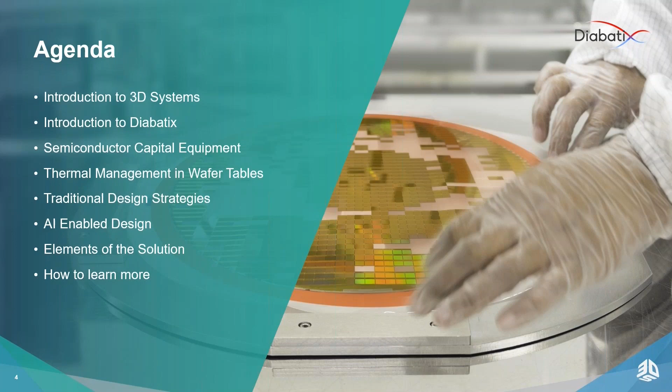And we will then compare the traditional design strategies with the design strategy that Scott and I took, or that both our teams took, in order to solve this problem and to get to better solutions. In the end, we quickly summarize what the elements of these solutions were, and of course we have a little dive in how you could learn more, or how you could get more information. But let's start with a quick introduction of the two technologies.

Yeah, first I'll start off by talking a bit about 3D Systems. 3D Systems is organized into two major solution groups. On one side, you've got the healthcare solution group with some segments inside. On the other side, you've got the industrial solution group with segments inside. And I manage the semiconductor solutions segment. And as you can see, we are hyper-focused on providing full solutions to industrial segments, as you see on the screen, including energy, aerospace, consumer, transportation, motorsports, as well as green technology. Next slide, please.

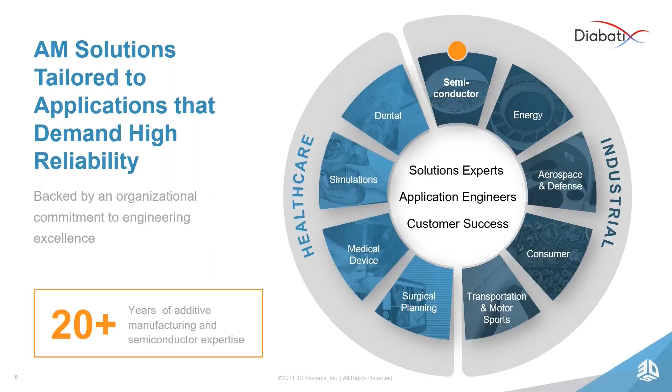A little bit of background on 3D Systems. We developed the first SLA 3D printers, so you could say we invented 3D printing about 40 years ago. And not only are we the company that invented 3D printing, but we've continued to innovate over our nearly 40-year history. So as you can see, we have continuous innovation, and here's just a sample of some of our latest. Next slide, please.

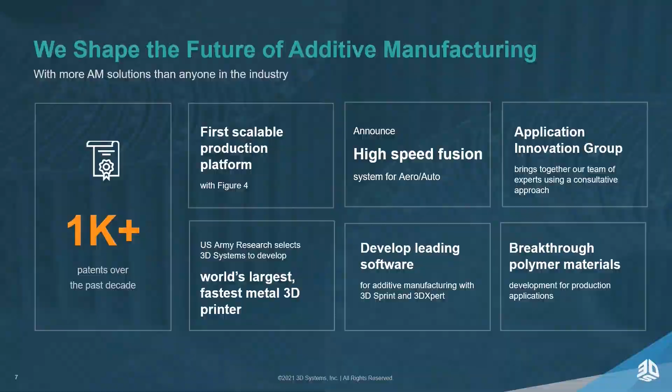And we use a very unique approach to helping our customers be successful with additive manufacturing. It's about a 5 to 6 stage approach, which allows us to start with a feasibility study and an exploration of applications or a potential problem solving exercise. And following that, after we find some low-hanging fruit together, what we want to do is try to innovate. And once a customer has decided to make a transition to additive, we try to figure out how to make the best use of additive technology, and that includes working with our friends such as Diabatix to really cram as much value as possible into the transition to additive manufacturing of legacy parts or brand new designs.

And then we continue on to develop the actual manufacturing process and validate its compliance with your requirements, and then figure out how to either produce in a short run or batch production, or transition that production off to a manufacturer which can really scale up.

So our business is not a service bureau, but what we do is solve problems and do bridge production or long-term production for our customers. But ideally, we want to help take that whole package of information and transfer that technology off to a supplier, which can help scale it to large quantities. Next slide, please. Thank you.

And then again, we do have over 150 machines working 24 hours a day, 365 days a year in highly regulated industries. So we have all the appropriate certifications to do highly regulated work. And I like to say we specialize in torque as opposed to speed, because what we can do is offer batch production solutions across the whole range of materials that we do have.

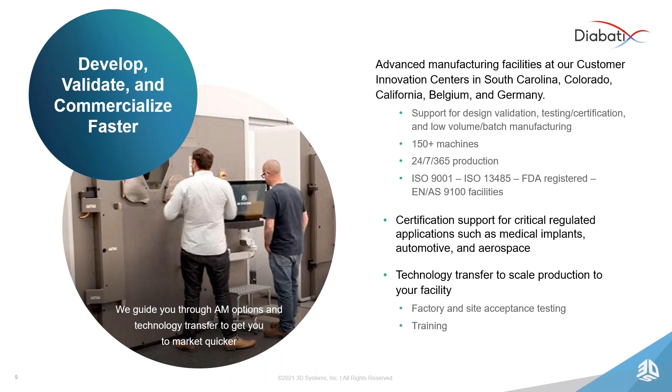And we're running over 150 metal machines nonstop, 24 hours a day and 7 days a week in highly regulated industries. As you can see, we have all the ISO certifications to operate in FDA environments as well as aerospace. And I like to say we specialize in torque, which means what we can do is offer the broadest range of capabilities across all of our materials and across all post-processing capabilities to really certify and create a process that can be scaled up. Next slide, please.

Okay, thank you very much, Scott. Let's take a quick deep dive as well into the technology of Diabatix. Diabatix, the company itself, was founded in 2016 in Belgium, and we specialize in generative thermal design. And by doing that, we try to innovate the way thermal engineering is done, and we try to basically guide thermal engineers, thermal architects to a new workflow. And this new workflow, if we evaluate it over our clients, typically ends up in 30% better thermal performance. I think the use case of today is an excellent example of that.

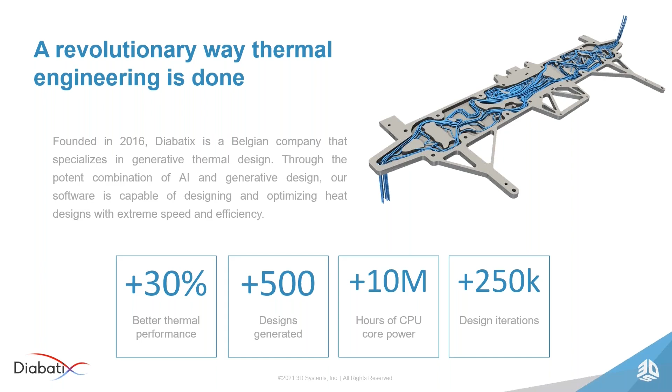The way we do that is we apply generative design, and basically we wanted to get rid of the conventional way of engineering, where engineers approach designs by making CAD models, simulate it, go back to the drawing table, reshape the CAD model, simulate it again, and we try to fully automate the design cycle to get to optimal heat sinks in no engineering time. So besides the thermal performance gain, we try to focus as well on reducing engineering time. We know all your time is limited, and if we can automate a part of the design job, I think that's a useful case for everybody, especially in complex situations like the semicon example that we have today.

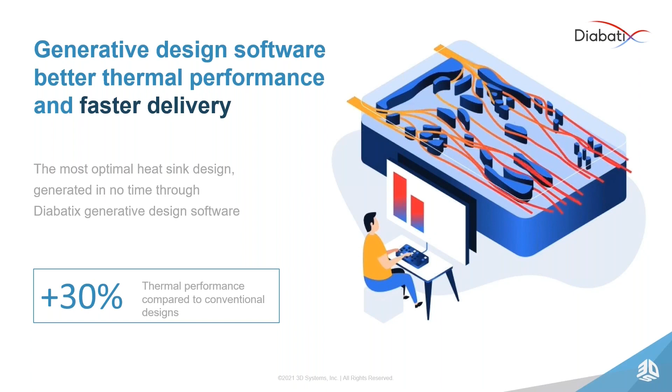And this technology nowadays is applicable in a lot of industries. If I have a look at the most common industries where generative design for thermal applications is applied, I'm looking into data center cooling, aerospace, electronics, laser cooling, where you have a very high power density, automotive, of course, because there the challenge is very big with the switch to electrical mobility, and as we will see further on in the webinar, of course, the semiconductor industry, where especially temperature variance is really important.

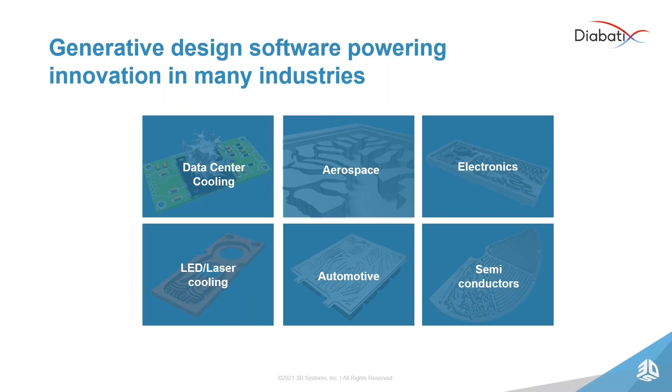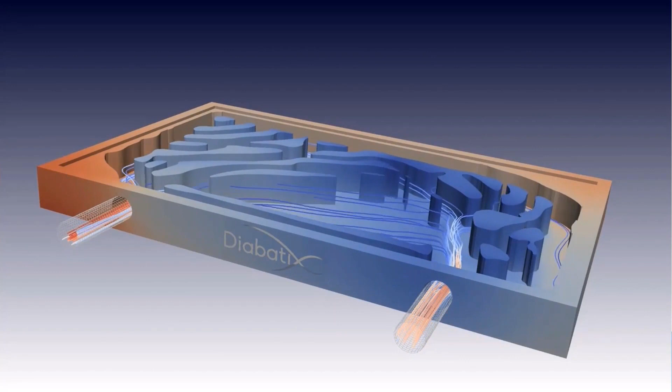To get you familiar with the technology, I'm showing you one short movie on how a design is generated, just to give you a look at how generative design works. What you can see happening in here is one design run where 500 to 1,000 iterations are happening. And in each of these iterations, a design is created and is analyzed. And based on this analysis, a new design is created and is improved. And by letting the computer just do it over and over again, you get to better results. So that's, let's say, generative design at a glance.

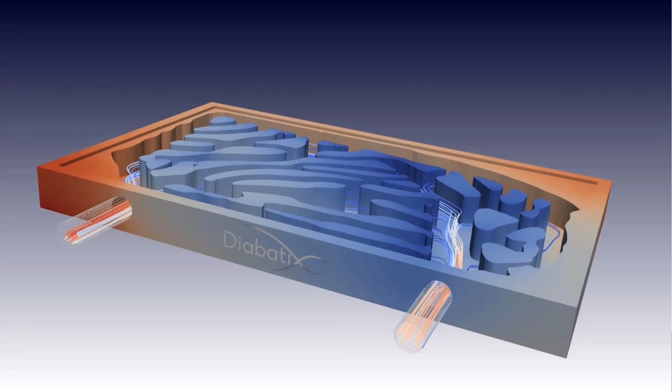The biggest benefit of that is that you can create very complex boundary situations, very complex constraints, and so on. It's a computer system, so it can handle that as long as you put enough computational power in the back. And by handling these complex situations, you can come to very good results, which are, as engineers, very hard to achieve because of complex situations.

And with that, I'd like to take a look at some of the issues related to semiconductor capital equipment manufacturing, as well as semiconductor supply chain. So we'll give a little bit of insight on what's happening with the chip shortage and what's going on in the semiconductor capital equipment industry.

This equipment is very critical to feeding the silicon wafer product into the supply chain so that we can all buy our phones and drive our cars, and we're all feeling that pain right now. So right now supply chains have been disrupted, and that doesn't mean just getting the product into your computers or your electronic devices. You've got a very complex manufacturing tool. There's a supply chain that feeds that too. So in order for foundries which make use of this equipment to produce silicon wafer product, they also need to produce capital equipment, which is highly complex.

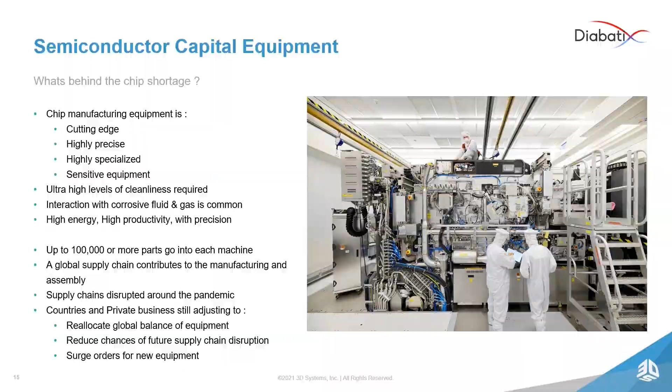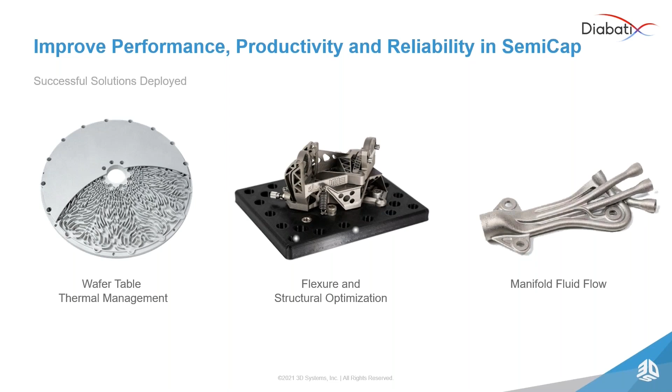And there are three clear examples of where additive manufacturing and generative design can contribute to this space. Those are wafer table thermal management, which will be the subject of the rest of this presentation, and also optical flexure integration, as well as structural optimization of components which need to have high strength to weight ratio. And of course, in wetter processes or hydraulic applications, optimizing manifolds for smooth or laminar fluid flow and reduced disturbance in a line is quite critical. But most of our look today is going to be at the wafer table thermal management. So let's talk about some of the challenges related to that.

Now, in a typical problem description, we want to talk about the challenges and the benefits of the solution. Some of the challenges with wafer table thermal management is you typically have cross-functional design committees, so many people involved in trying to develop this machine and every single component in it. The more people you have involved, the slower sometimes a process happens. And specific technical problems are you want to maintain the most even temperature across the surface of that wafer as possible. And there are several reasons for that. Sometimes you need to condition or relieve stress on a wafer so it stays very flat during a process. And then later you may want to keep that temperature at a stable state during the lithography or deposition or photoresist strip process.

So because of that, it's very important to have the ability to precisely control temperature gradients as well as time to cooling. And then additionally, for any complex component, you always have some sort of assembly, quality, serviceability, or component longevity issues. Anywhere there's a weld or an assembly, you have a point of failure.

So it's preferred to have single monolithic, functionally consolidated parts over assembled parts, not only because of serviceability, but also production time. It's much faster to make those. And then again, because of the semiconductor supply shortage, production and productivity is always going to be a concern where we're trying to crank out more wafers as fast as possible with better quality. So anything that is going to reduce or shave off seconds in cycle time is going to be helpful.

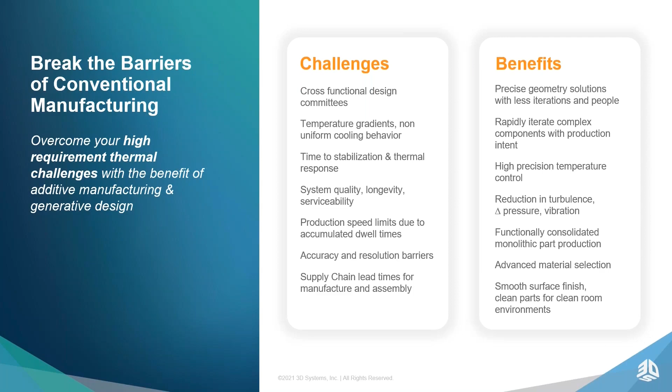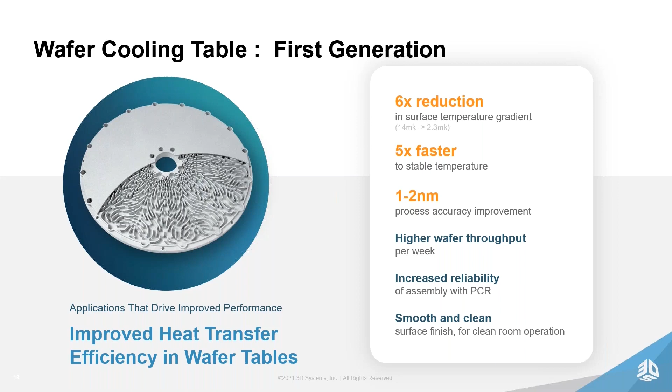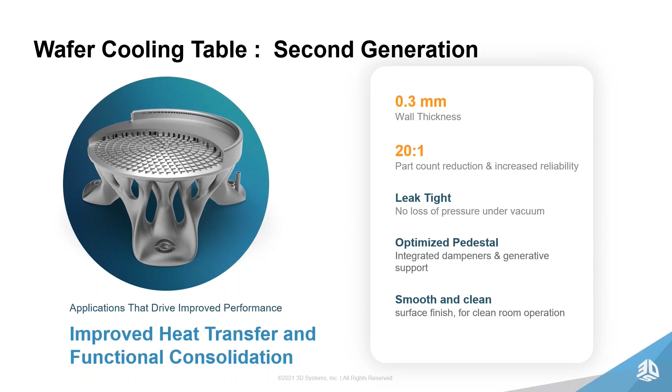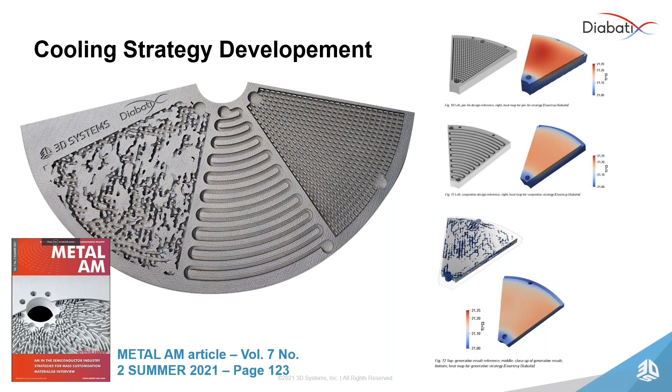And the next thing we're going to discuss is a deep dive on this cooling structure. So let's talk really deeply about cooling structures and how they can benefit silicon wafer manufacturing. You may have seen our Metal AM article, which is a case study on optimal cooling structure design. And here's a quick look at the end result that we're going to go over in our next slides.

Now, let's talk about traditional design first. Traditionally, in order to create a cooling pattern, we start with a best guess in traditional design in parametric CAD to hit some specific requirements. And the requirements of a wafer table are going to be low pressure loss. So you want to make sure that you're not overcompensating or pushing too much fluid into the system and then losing that pressure with a super long line or inefficient cooling pattern.

You also have a requirement for very low temperature gradient across the surface. And that's a measurement of how much you're allowed to fluctuate in your temperature across that surface. And that requirement means that you must have very good heat spread or cooling spread. So you need to be able to control that temperature within a very narrow band across that surface. And anywhere possible, you need to be able to have a short cooling time or short heat up time, as well as a rapid thermal response. So if things change and you need to compensate and overcool or overheat to compensate for an environmental situation, that thermal response needs to be very precise again, and this affects productivity.

Also, you need to consider the fact that when you're creating a very complex component that may be traditionally manufactured out of multiple pieces through machining and braze welding, the part needs to be long-term stable with no leaks, and it also needs to be mechanically stable, so you need to reduce any chance of vibration or variability in that process, because in semiconductor capital equipment, productivity and success relies on the system working as close to theoretical values as possible. So you need to create that environment inside the machine.

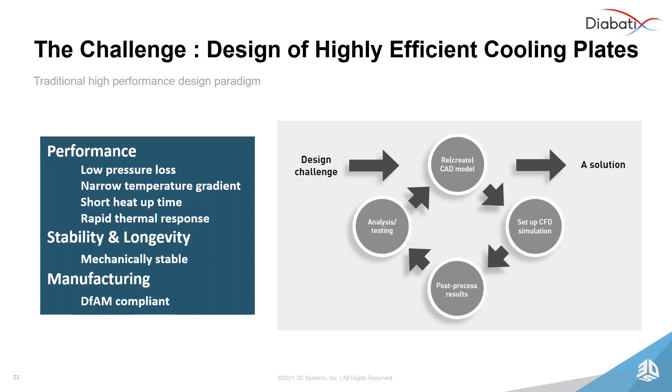And finally, from a manufacturing perspective, with traditional design, you're going to have so many limitations with what you can do that typically you've got a lot of design for manufacturing constraints. And when trying to transition this to additive manufacturing, all of these things need to be considered simultaneously, and that actually involves quite a lot of people and iteration with tools on the market today. And now the Diabatix solution offers you efficiencies that we're going to talk about in the following slides. Let's talk a little bit more about the limitations of traditional parametric design.

Now, best guess is typically the way most thermal engineers start, using some design simulation or thermal simulation. They make some best guess at the patterns that they can implement based on things that they know from the past. Now, the problem with that is if you're using a parametric framework for a design architecture and trying to edit that in the traditional BREP CAD environment, there's many limitations there.

A parametric design setup will allow you to have some iterations and customization of a design strategy, but it's easily breakable. It's not necessarily going to work for every single design iteration. So there's a very narrow window of parameters that you can change in order to get a quality result. And as you can see on the right, here's a design architecture that has some parameter adjustments associated with it, and you can see it being easily broken when parameters pass a threshold value.

So that traditional best guess approach is not ideal for precision cooling requirements or high productivity cooling requirements. It also doesn't take advantage of the value of additive manufacturing. To some degree, it may, but this design here is easily machinable. But then again, if you go to machining, you have to deal with traditional assembly and welding for consolidation of the design. And this does require a lot of lead time for traditional manufacturing, testing, simulation, and a lot of people involved in order to validate that design.

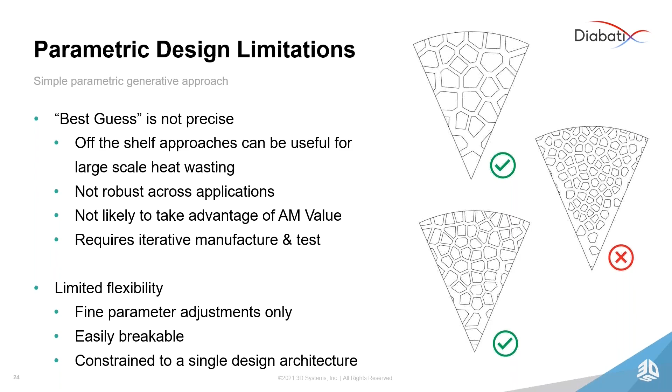Okay, thank you, Scott, for explaining a little bit about parametric design already. Now, one of the things that we did together in this case study was making a few traditional designs or parametrically optimized designs, just to see how they would behave if you would compare it with a design which was created with a combination of generative design and additive manufacturing.

And one of the first designs that we ended up with was a pin fin design, as you can see on the right bottom of the slide here, which is very easy to deploy. It's very easy to create. Also, if you want to optimize this in a parametric way, it's easy to define your parameters like pin distance, pin fin diameter, and so on. But the disadvantage of that is it's not very complex of a design, and I'm not saying that complex designs are required.

But the disadvantage here is the flow always follows the path of the lowest resistance. That's just the basic physics, and if you evaluate this design, then the fluid is going straight from the inlet to the outlet, and that is just creating some hotspots. Basically, your fluid is not spreading enough. Besides that, the gap between the pins needs to be very small, which again adds some challenges from other perspectives.

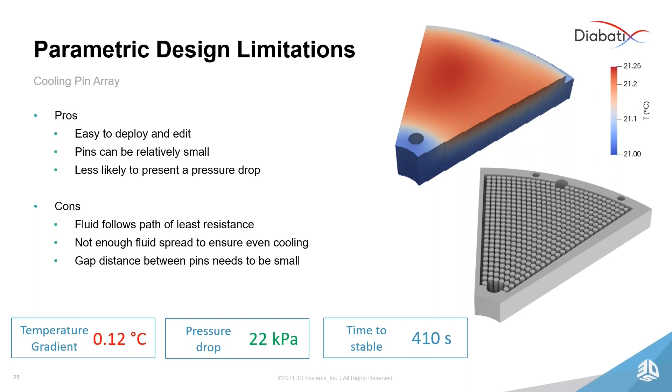Now, that's not the only design that we created. One of the other typical designs that you see coming with this way of designing is serpentine channels. So we designed one as well. We optimized it with parametric optimization, and you see that from thermal gradient point of view, this design is behaving very well at 0.09 degrees Celsius, but the pressure drop was way too high. We ended up with 420 kilopascal.

Again, the limit was at 70 kilopascal, meaning your system cannot handle this. So it's useless in the end. Although time to stable was 409 seconds, which is a little bit better than the previous design, it's useless. The pressure drop is way too high. That's only evaluated from a thermal perspective.

If we evaluate it as well from a manufacturing point of view, it is possible, but it's a very hard job to do the powder removal and chemical cleaning afterwards to get to a finished part in a decent way. That comes due to the long lines, the sharp turns, and so on. That is not only causing pressure drop, but it's also causing some difficulties in manufacturing. So those are two typical designs that you would see with the conventional way of engineering.

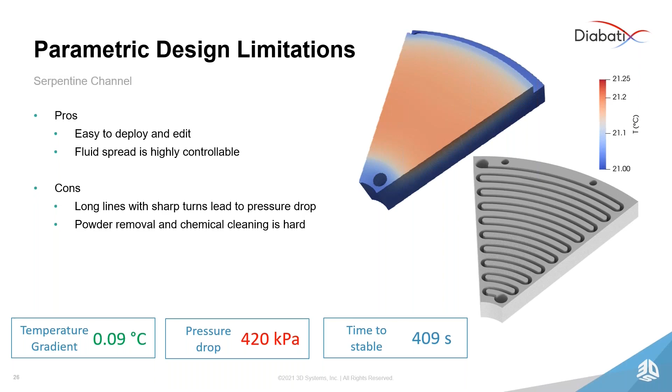And that's why Diabatix is trying to change the way thermal engineering is approached. We want to get rid of selecting that concept. First of all, it costs a lot of time to do that, and you will get to a solution with that way of working, but it will never be the best way of working. And the approach that we developed is actually bringing in generative design there.

And describing the problem will be more or less the same. So you start from a certain geometry, you sit together with your colleagues and you define what the design envelope is, what the boundary conditions are and what your design targets are. So that first step is a little bit the same. And then instead of going to your CAD environment and starting to design that, you just enter that into a generative design platform. For us, that's Diabatix ColdStream, which I will also demonstrate in a minute.

And what you do there is basically explain to the software the same things as you would explain to a colleague if you asked him to create that design for you. So you would tell him, those are the boundary conditions, this is the design envelope that you have, these are all the parameters, and this is what we try to design for. And once you have done that, and that's a matter of 15 minutes just to enter everything into the system, the supercomputers take over, and based on an AI-driven design method, generative design, the optimal solution is created.

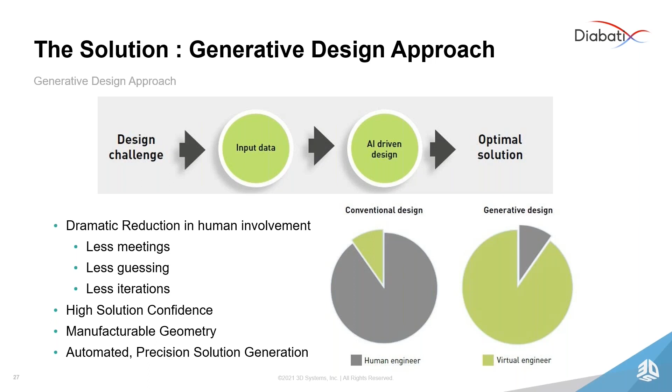And I think that's one of the key notes that I want to bring you during this webinar: if you combine this with additive manufacturing, you can use the full freedom of generative design, because you can get to very complex designs. And in the meantime, you get the full freedom of additive manufacturing, because if you just design something yourself, it's very hard to create very complex 3D structures. It's hard to think in that way. Combining generative design with additive manufacturing is really pushing the boundaries of both technologies here. So let's have a look at how this would look for this case.

So in general, the flow is we start with the design setup. Then the generative design part will take place. That's running the design on a supercomputer, and you immediately get to the final product, which you can download as a STEP format and send immediately towards your additive manufacturing capabilities to print it. But let's have a look in our software how you would do such a setup.

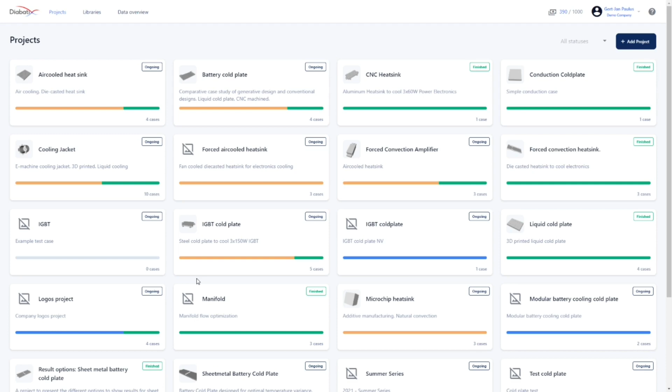So once coming on the platform, you have an overview of all running projects. For today, we are working on the Wafer Table, so I will open up that platform, and what you see then is an overview of all the cases that you are running. We will immediately go through the case setup and the post-processing that you would need to do in a case like this, but you can see already that there are 2 finished cases. Those are cases that I submitted a while ago already to be able to show you the result as well.

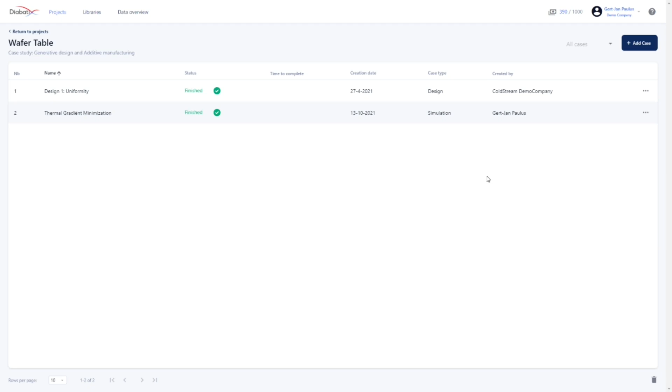But let's start with doing a case setup. So we'll call it temperature gradient minimization webinar, just so that I know that it's for this webinar. And then you need to select whether you just want to simulate a geometry or create a design with generative design. That's the case in this case. So you select design, you add the case, and then you are coming to the setup, which enables you to upload a STEP file.

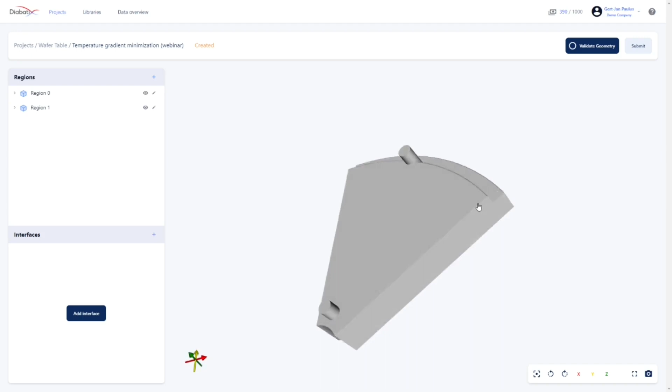What is now in this STEP file is basically this solid geometry, a fluid geometry, and the design region. And you can really see that as the wafer table without any cooling structures in it. So basically an empty geometry and the corresponding fluid region. And with the design region, we indicate which part of the fluid region may be used to create a design and which not. So basically you're giving the design envelope to the system. And that's what you get then, so you can visualize it as well in Diabatix ColdStream.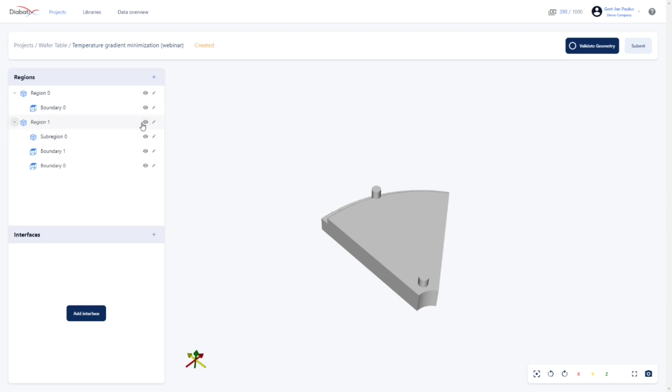As you might have seen in the slide deck already, we are optimizing today on just a part of the full wafer table. It's just to give an example of the system, so it's not on the full geometry. So let's go through the setup then. On the left hand side, you see the two regions. Let's expand them and let's hide one. So you can see this is a solid region, which is empty at the inner side.

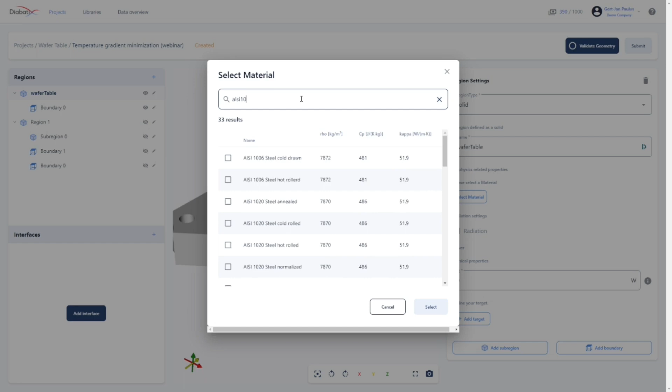And the first step that you need to do is indicate what type of region it is. Is it a solid region or is it a fluid region? In this case, it's a solid. And let's give it a name as well, Wafer Table. And then you can select a material as well, which is in this case aluminum, silicium, 10, magnesium. Voila, we do have a default library of materials, meaning you can easily select materials. If you have some specific materials, you can of course add them to the library and they will be available for you, but not for other companies, of course.

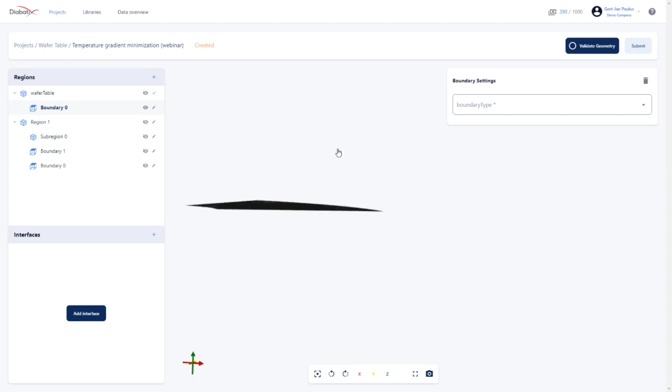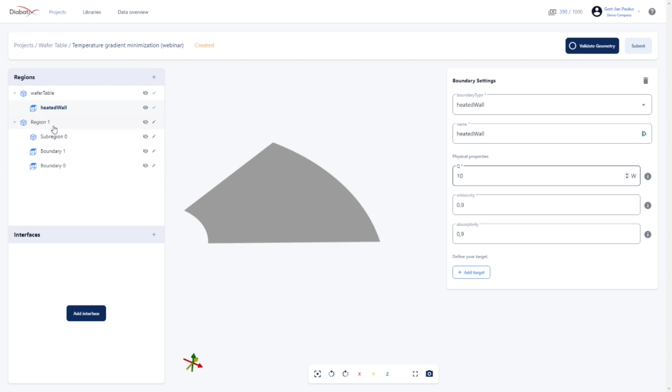What you can see then is that there is a boundary added to this geometry, and let's only visualize this one. This is the patch where we want to apply a heat load to, and then you need to select again which type of boundary it is. Is it a fixed temperature wall? Is it a heated wall? Is it an external wall? In this case it's a heated wall. I'll also just give it a name, and it has a heat generation of 10 watt. So this is basically your input. Let's go to the second region then. That must be the fluid region. So it's a fluid.

And again, you need to select which type of fluid it is. Is it air? Is it water? Is it a certain mixture of water glycol? In this case, I will just take water with the properties fixed on 20 degrees Celsius.

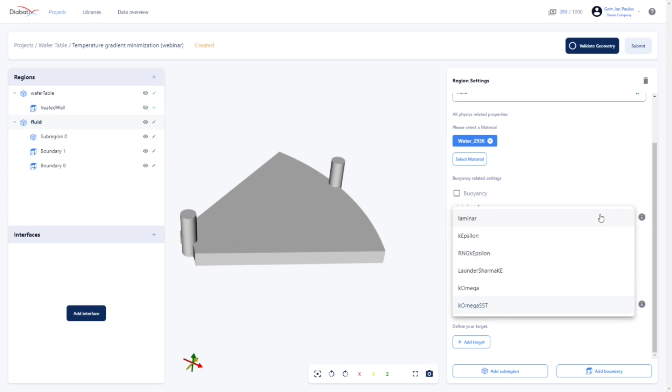And you need to select the turbulence model. That's the next step. You have a few options available, and if you don't know which one to select, we always give a recommendation, and in this case it's K omega SST. So let's go for K omega SST, and then you see that there are a few more layers as subregions in this region. That's what you can see in the region tree.

So let's start with the subregion. That's then the design region. So basically this is the part of the fluid region where structures may be added. It's a little bit like if you would ask a colleague of yours to design something for you, and you would say, in this region you may place structures to optimize the cooling. That's this, but you're explaining it to a computer system instead of to a colleague. So let's call it design.

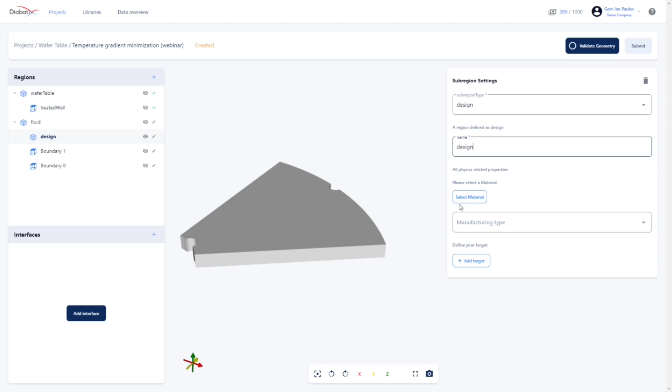And then you can select again a material which is added, which is in this case just the same as the solid region. And you can select a manufacturing method with the corresponding manufacturing settings.

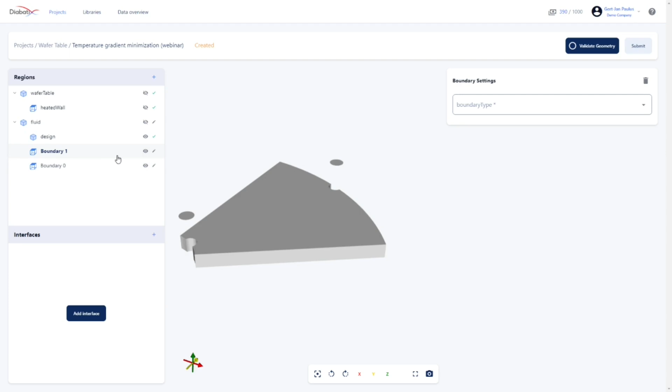Voila, then let's go to the two boundaries which are added, that are the inlet and the outlet patches. Let's start with the inlet patch. That's the one at the outer side. Again, you have different options going from a pump inlet to pressure inlet or fixed flow rate inlets, which is the case in the last one. So you give the inlet temperature, you also give the mass flow, which I need to look for a second.

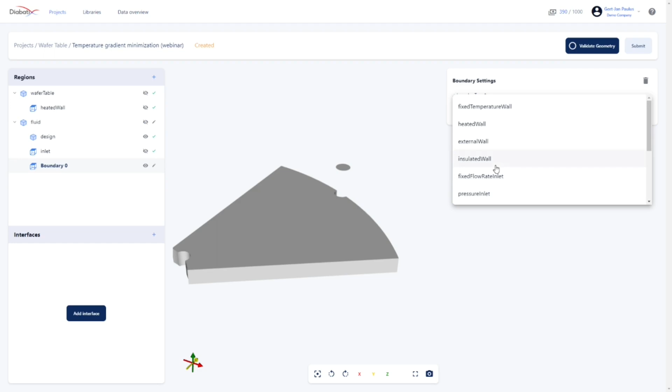So, the mass flow is expressed in cubic meter per second, 0.000125. So that's it for the inlet. And we also need to define the outlet, of course. And that's just a pressure outlet, meaning that we fix the pressure at that place to 0 Pascal.

So now we have created the boundaries already. We have given some information about the design space. We have given some information about the manufacturing setting. Next thing that we need to do is give a pressure loss constraint, since the pressure loss was limited in this case. And how do you do that? Since we have fixed the pressure at the outlet to 0 Pascal, we will put a constraint on how high the inlet can go. And that's 70 kilopascal in this case.

And you just select the inlet patch again, add target, select pressure loss, and you enter the value, which is the maximum. Last thing that we need to do before we can submit a case is say what we want to minimize or what we want to optimize. And that is in this case the temperature variance on the heated wall. So we select the heated wall again, you add a target, and you select temperature variance minimization.

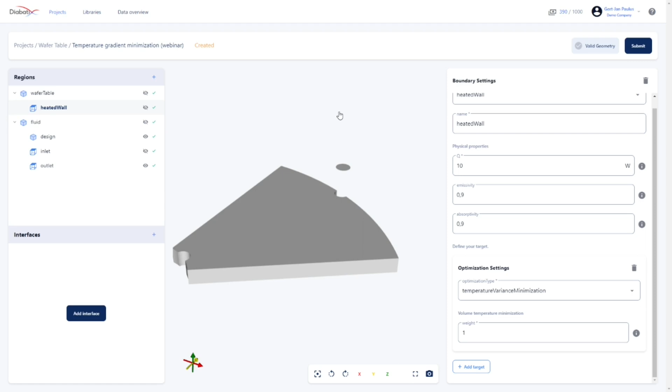And that's it. Only thing that you need to do then is validate the geometry. Now the system will check if all the boundaries match all the geometries, which is in this case approved, and then you can submit the case.

Last thing that you need to select then is whether you want to run this on a detailed level or a conceptual level. Detailed is on a very accurate mesh to get a very detailed result, which is fully ready for manufacturing. Conceptual is on a rougher mesh. Results are a little bit less accurate, but it's just to give you a first estimation of your result. What is possible? It's more to get what is feasible with your design and how far you can go.

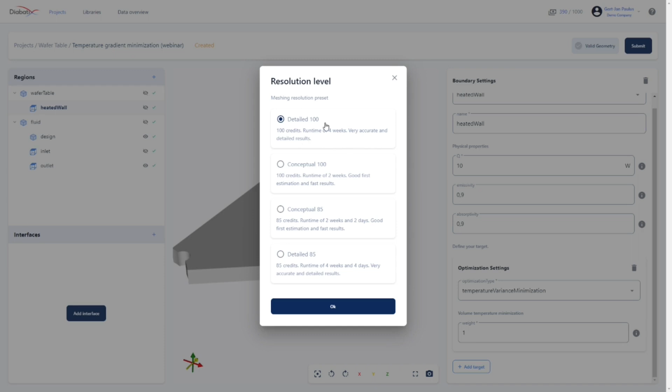And then you can also select if you want to run this with 100 credits or 85 credits. That is basically representing how many cores you're putting through this job, and that depends of course as well on how long it will run. For this case I will select detailed design, 100 credits, and I click OK.

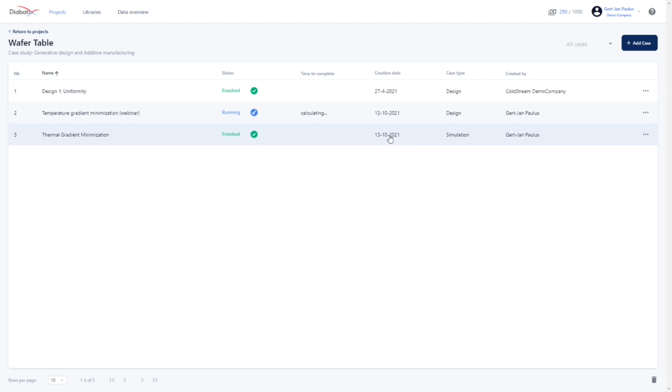The case is now sent to the supercomputer and I will get a notification in my email box when it's ready. But as I said, I have submitted this case already a while ago to be able to show you the results as well in the platform. Now we will have a detailed look as well in the presentation on the result to compare it with the other simulations. But let's have a look as well on how this looks in the software.

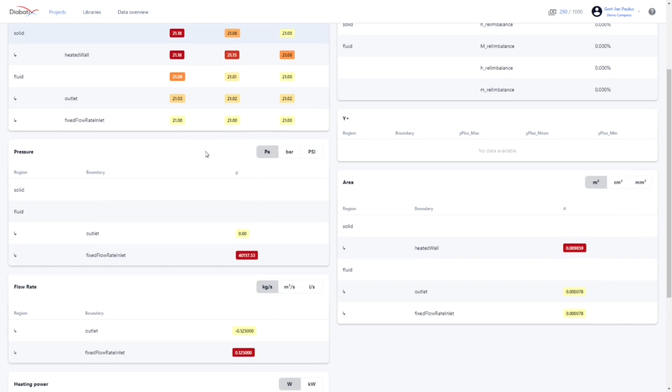So if you enter a case, you are able to see a summary of the results, and you can change the dimensions as well to make it a little bit easier to have it all post-processed. And then you can have an overview of all the relevant temperatures, the pressure losses in different units again, an overview of your input, and a little bit of information on, for instance, the imbalances.

You can also download the result, which is of course also interesting, and you can visualize the 3D result. What you will be able to see then is a basic post-processing module of your case. So you will be able to visualize the temperatures, you will be able to visualize things like the pressure and so on. So here we go.

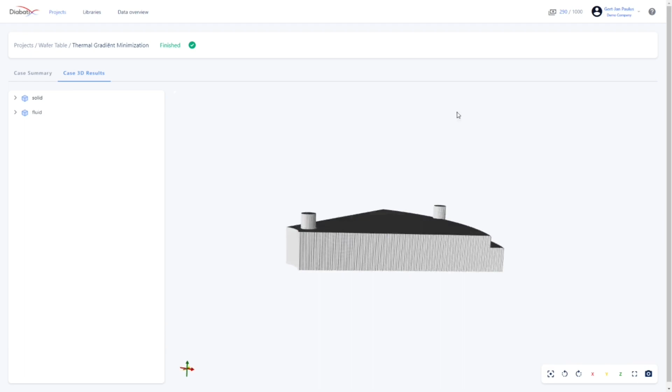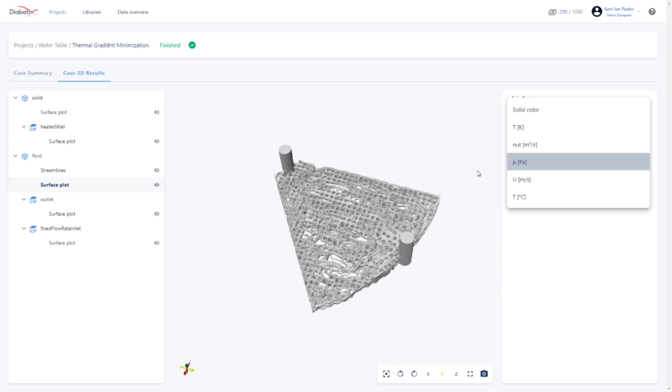You can see the case now, and here on the left hand side you can see the structures again, which we added in the pre-processing. I will quickly hide some of these, and let's have a look first for the design which was created, which you can see here. So you can really see the 3D geometry here, and for instance let's give it a color according to the pressure. Voila. So now you can really see the 3D structure which was created.

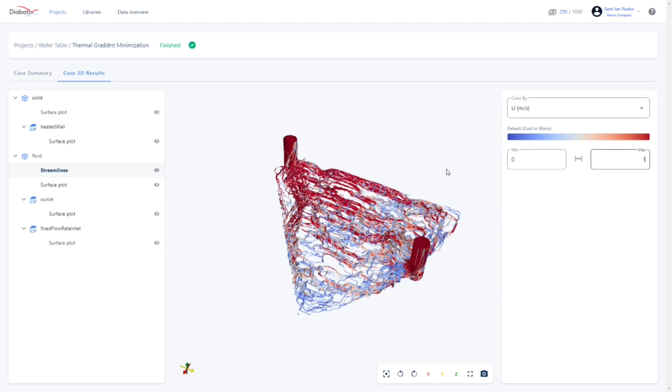Voila. We can visualize it as well with some streamlines, which we can also color, for instance, according to the velocity. And then you can see really well how well the fluid is spread in this design, if you compare it, for instance, to what we have seen in the pin-fin design.

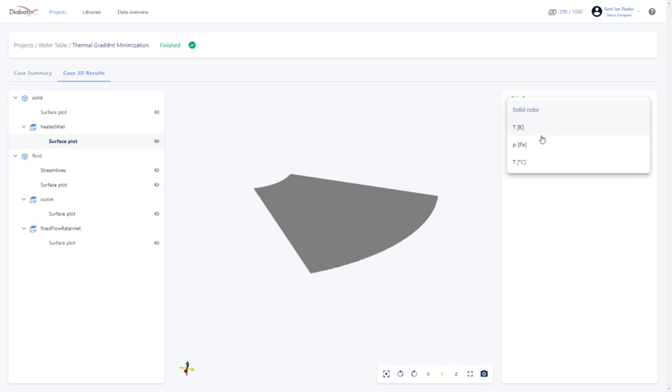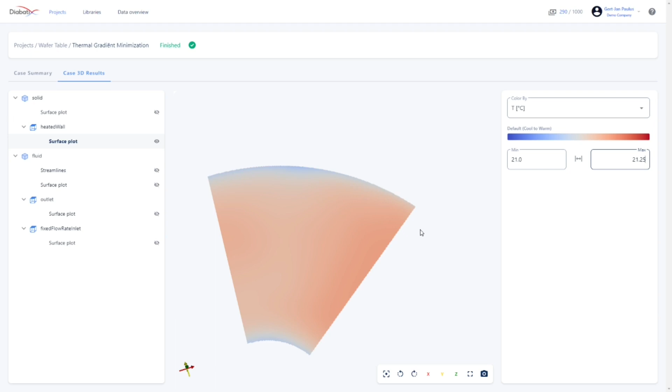Voila. Let's have a look then as well for the temperature spread. So let's visualize the heated wall and rescale it to the same scale as we had for the previous results, and then you can see how good the spread looks. So it's a very basic post-process module, just to give you a quick overview of how the results look. And from here on, you can then also download the results. So let's switch back to our PowerPoint.

And that's how it looks in the Diabatix Coldstream platform. So you really can see the engineering time, so the time that you need to spend to get to your designs, is very limited. It takes a little bit of time to run the generative design, but in the meantime, you can work on other products, or you can work on system level, or do other stuff. The design is created for you.

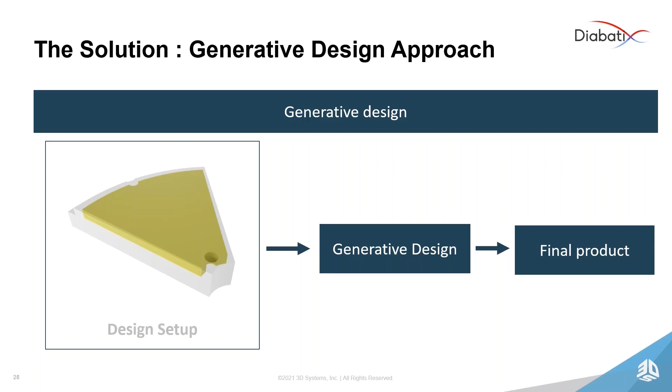Let's have a look as well at a summary of the results and evaluate again the same 3 key parameters. So the thermal gradient was at 0.10 degrees Celsius. It's a little bit higher than what you had with the serpentine design, but your system couldn't handle that because of the too high pressure drop, and still the thermal gradient is within the acceptable range. Pressure drop is at 40 kilopascal, so also within the acceptable range, and time to stable is at 381 seconds, which is significantly lower than what we have seen so far.

So if you would compare it with the 2 other designs with the conventional method, this is the only design which fulfills all your design requirements, and that's really the challenge which we see reoccurring in all the problems of our clients. Problems like this are becoming very, very complex.

The demands for pressure drop, for temperature gradient in this case, and you see the same with battery cold plates and so on. It's becoming so complex that it's very difficult to solve with the conventional way of engineering. And if it is solvable that way, it costs a lot of time. And if I have learned one thing over the past year, it's that time is one of the most valuable things in engineering. With a system like this, you can reduce that significantly.

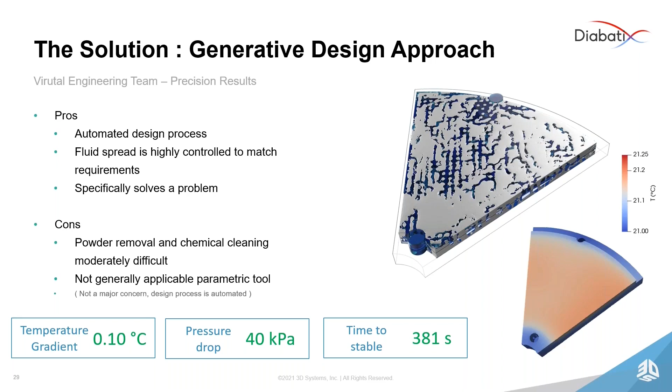And if we summarize all 3 of the results, you see in terms of thermal gradient, the serpentine design and the generative design were performing well, while the cooling fin array was not good enough. If you evaluate the pressure loss, you see the opposite. Well, the generative design is still performing well. The cooling fin design also, but the serpentine design had a way too high pressure loss.

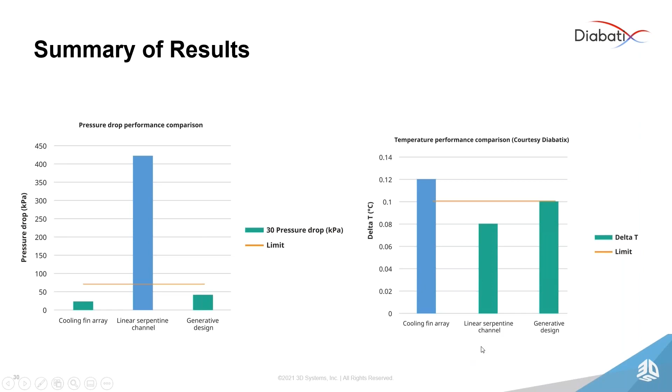So to conclude, generative design is solving all of the design constraints here, which was not possible with the conventional way of designing. So that's for the design part. Let's have a closer look as well at what that would mean in terms of manufacturing.

Yeah, thank you. Yeah, great summary. Let's talk a bit about how we end up actually making this. Here we're taking a look at a cross section of the part. So the top has been chopped off so we can appreciate what's inside. Now, typically this would be printed fully enclosed, so it would look like a fully enclosed disc, and it would be kind of mysterious what's inside, but you would know as you had designed it.

So we printed this pie, what we call pie section, on a DMP 350 machine, and this fits nicely inside the 350, and this is just a sample demonstrator. We printed this in aluminum 6061 RAM2, which we offer through our AIG service, as well as to customers. We have parameters available for them.

Now, on a full-scale wafer, 300 millimeter wafer, you'd want to put that on a larger volume system like the DMP 500. DMP 350 could handle smaller 200 millimeter wafer tables or cooling tables. But if you're at like a 300, 400 millimeter cooling table, you would want to go to our larger frame system we'll talk about in the next slide.

And from a post-processing perspective, heat treat was applied to this. We have various heat treat options we have experience with across our material portfolio. And this was set up completely flat on the build plate. So a wire EDM process will create a precision flat bottom surface. And in this case, we used simple vibratory powder removal.

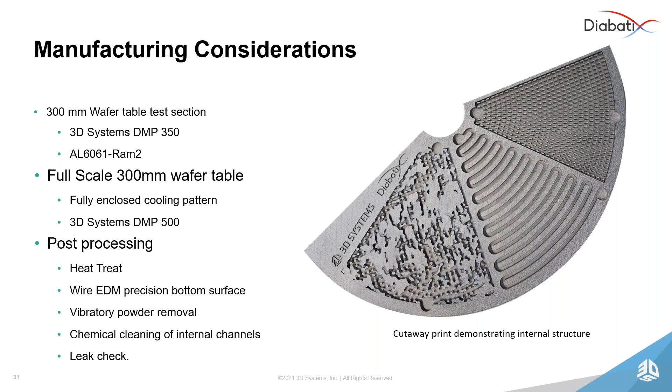And the final thing you'd want to do is a leak tight check. And typically, when we go into a production process like this, we'll print some small section, like one of these pie pieces, with fittings, and do a leak check first to ensure that the design can be trusted and scaled to the entire platform. And you may have various non-destructive testing requirements, such as CT or ultrasound, to verify, based on your own company procedures and policies, the density of the part and the integrity of the part.

And with that, what we'd like to do is talk about some more details about the elements of our solution. Now, 3D Systems is not only a component of the solution as a solution provider with Diabatix, but we're also a tool builder. So we are a manufacturer of direct metal printers as well as polymer printers. And here you can see what we call our mid-frame systems, DMP Flex 350 and the Factory 350, with a build volume of roughly 275 by 275 by 420. So a little bit higher in height than in XY.

In this case, we have a best in class low oxygen environment with the argon flooded environment that gives us high purity and low porosity of the process. We also offer real-time monitoring so that you can inspect and collect data and anticipate possible events, which would contribute to part quality issues, without having to do destructive or non-destructive testing.

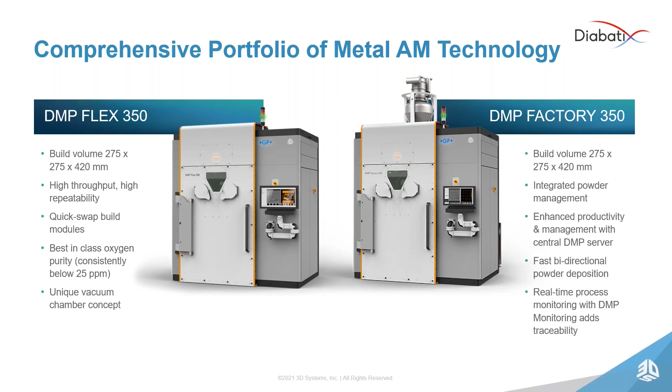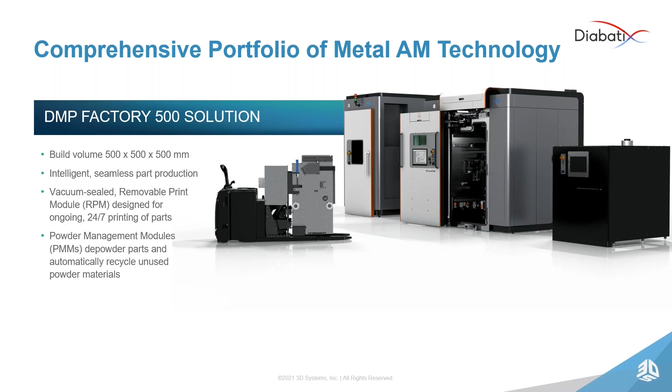Now, for larger volume parts, we would want to take a look at the DMP 500, Factory 500 solution, which is a full 500 millimeter cube. And it's a good choice for large volume parts, not necessarily for high quantity serial production. It's our specific choice for larger volume wafer tables or larger volume semicon components that don't fit on the 350. And we have these available in our AIG network.

Let's talk a bit about materials. Now, I have this ordered from left to right in what we're commonly seeing in wafer table applications and semicon in general. Quite a bit of aluminum uptake in semicon, and we've just recently released alloy in partnership with AP Works and aluminum 6061. We're seeing still quite a bit of the traditional AlSi10Mg, though in some cases the silicon content is not appropriate for the application due to contamination considerations in the wafer system. But still, we do see many of our wafer table applications are based on aluminum.

We do offer, of course, the typical and traditional titanium grades you would find, and those are very valuable for fluid flow applications, high strength to weight ratio, and areas where you'd have corrosive environments. And we offer 316L, which we commonly see in semi-cap for semicon capital equipment. We are seeing the traditional kind of 718 and 625 Inconels being used for their corrosion resistance and not for their temperature resistance. Those alloys are highly resistant to corrosive fluids and gases, maintain their structural integrity with good strength to weight ratio as well.

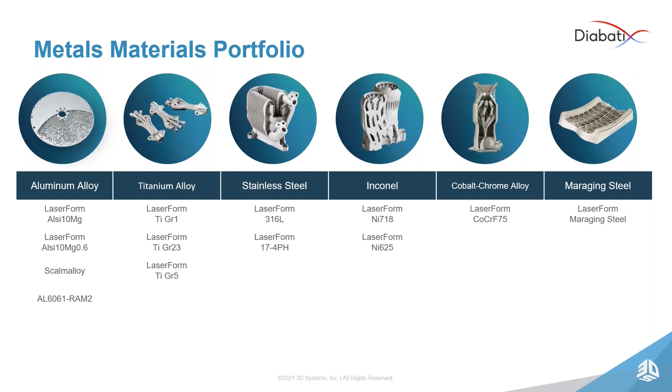And it's got all the traditional kind of healing and fixing things you might expect from meshes, but a key feature here is that we do slice BREP CAD directly, and we can slice hybrid models directly. So if you have a generatively designed result infill, you can put that right on top of a BREP file, and we don't care what source data it is. We can slice both together and create a single slice file. And that also comes with build simulation, which allows us to check the build risk and predict the build quality. That comes with 3DXpert. And you can do some level of post-processing downstream for NC machining.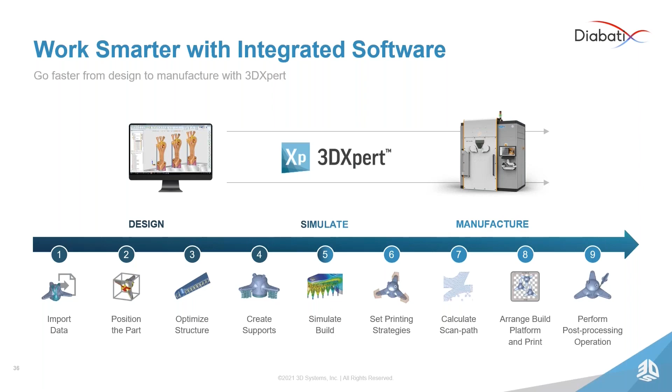Okay, and let's have a look then as well to which elements were there on the generative design side. First of all, as I demonstrated, the Diabatix Coldstream platform came in, the focus of which is optimizing thermal and flow. What you typically see there in terms of performance is 30% improved thermal resistances, improved heat transfer, lower pressure drops, which you have clearly seen in the examples that we showed, and much more. And of course, especially in complex situations like this, it's saving a lot of your time and reducing cost as well. And this process is exponentially making your design cycles faster.

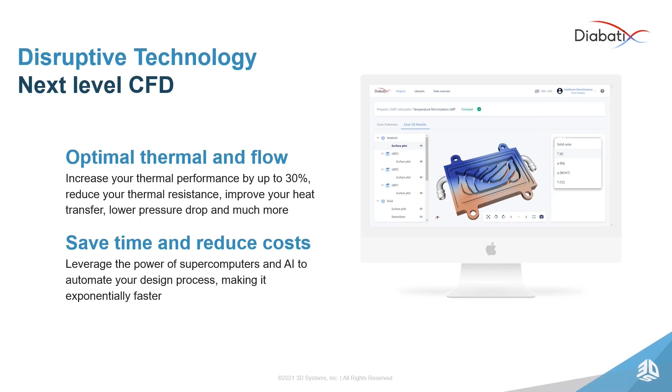Besides that, if we have a look to the combination with generative design, one of the key elements of this platform is a greater freedom. You can go beyond human imagination, and if you have a look to the design, this means a lot more complex geometries than what you would get with conventional engineering. So the design freedom is much bigger. And besides that, typically if I say you will get much greater design freedom, people always say, yeah, okay, but then we cannot manufacture it anymore.

One of the key elements of this system is that it immediately incorporates manufacturability. That's why you saw me selecting the manufacturing settings while doing the case setup. It's because those manufacturing settings are taken into account during the design process, meaning that the design that you get in the end is manufacturable by the parameters that you selected. And that's all done by the Diabatix Coldstream platform. The platform itself is very easy to use. It's just an in-browser software. So if you have Google Chrome or Firefox on your computer, you don't need to install anything. You also don't need to have a very powerful computer to run this.

As I have said a few times, it is computationally very extensive, and you need a lot of CPUs to run this. This is backed up by Diabatix. So we provide you with the necessary cloud computational power in order to get your complex designs in a fast way to

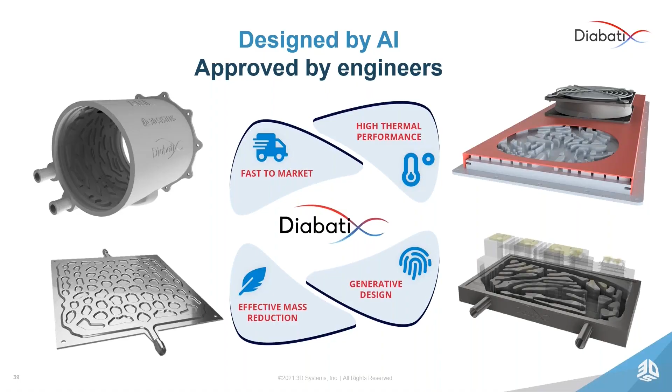So those were the key elements on the case study that we did, and to give an example of what the combination of additive manufacturing and generative design could mean to you. We'll take the opportunity to show you a little bit as well on how the cycle would look, and we would like to direct you as well to some places where you can find more information. Scott, can you maybe enlighten us a little bit more about this approach?

Sure. Now, again, this is just a reminder of our approach together. What we intend to do is de-risk the process of combining generative design and additive manufacturing. So because of that, what we'd like to do together is both Diabatix and 3D Systems come to evaluate or explore some potential areas of contribution to your engineering and your system, and participate together in an innovation process where we can help guide you to a possible solution through the combination of these tools.

And then we would go through the process of figuring out how to make it, how much it's going to cost, how long it's going to take, and do all that work together. So you're learning along the way, and we're de-risking the process so that if you do take on the technology, or you take it on between yourself and a supplier, you can be productive almost immediately, and the training time is quite minimal.